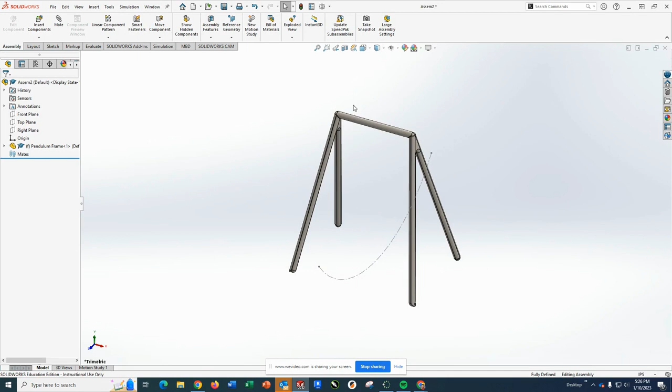The next component you're going to bring in is, click insert and bring in the pendulum. The pendulum is this large brass looking thing. We're going to use a mate that you're probably used to—we have a round hole and a round pivot point.

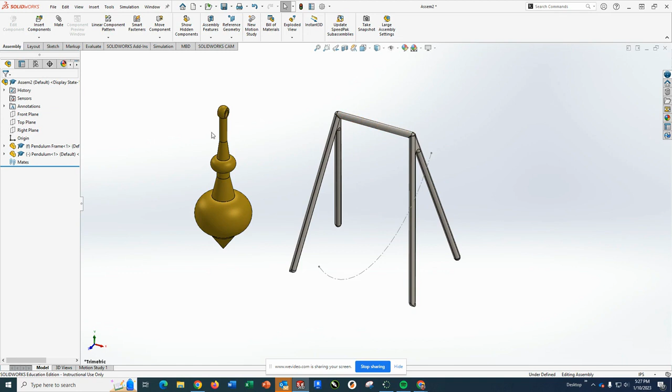So we're going to go ahead and click mate. The first thing we'll do is put the hole around the cylinder and make them concentric. At this point now, it'll go on there and it will rotate. Now a couple things next.

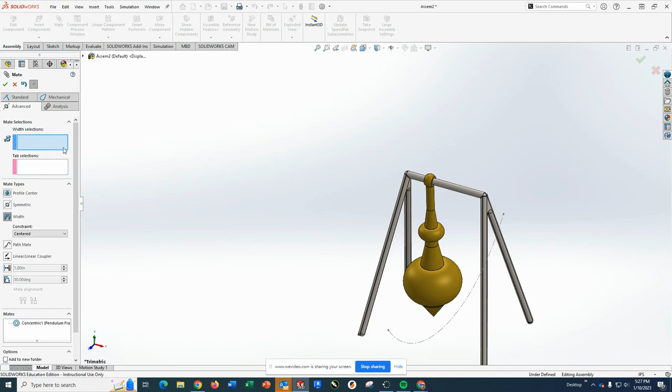First off, the width mate. What the width mate will do is put an item equidistant between two other faces. If I go to the advanced mates and pick the one that says width, the width selections show you kind of the opening or the size of something, so you just need to pick two that are the same. You can pick either this surface and this surface, or you could have picked the two outside surfaces. Again, as long as you pick inside-inside or outside-outside, you should be fine.

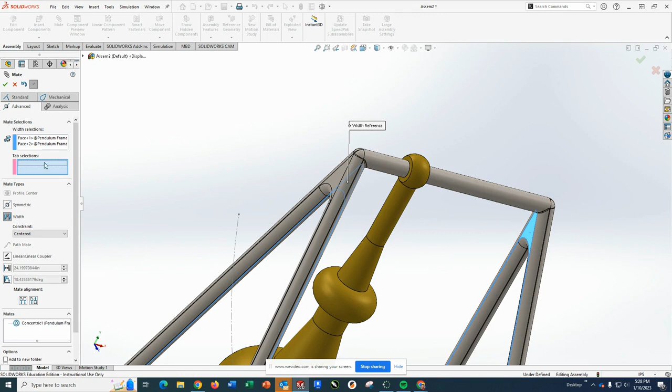But it does force you to pick surfaces—you can't really pick lines. And your tab selections are the selections of the item that should be centered, so we're going to pick both sides of this face. What it will do is center that so that it is in the middle. So as you do this now, you should be able to take the pendulum and swing it back and forth, and you can swing it all the way around.

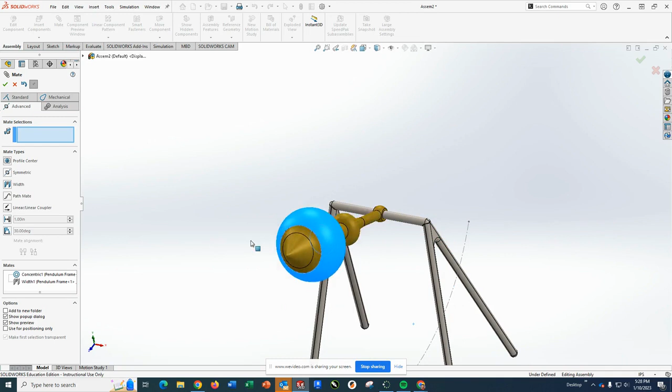Now the last thing we're going to do to kind of lock this in is we're going to apply what's called a path mate. You should notice that we're kind of right there where we need to be. So under our advanced mates, when we click path, it's going to ask us for two things.

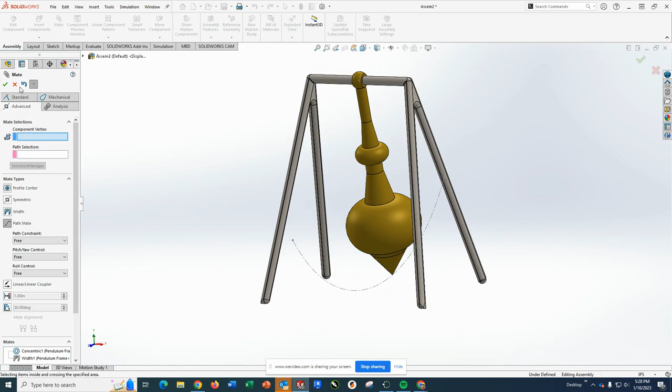The first thing it's going to ask for is—you know what, I'm going to get out of this and kind of angle this. So first off, using Control 7, that way you've got the front side, the right side, where they should be normal. And I'm going to bring this up such that the pendulum comes all the way past the path.

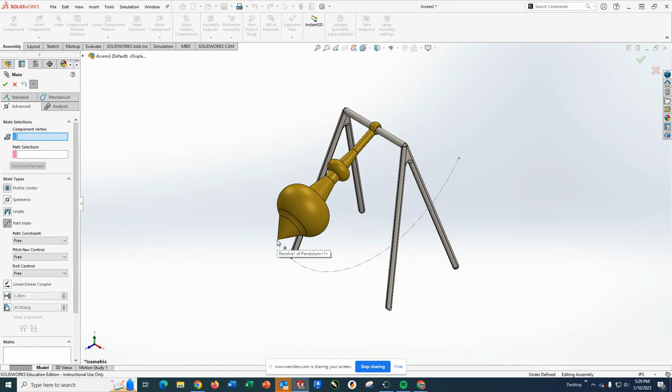Now when I do this, I'm going to take my mate tool, go to advanced, go to a path mate. I've got two selections: the component vertex, which is the very tip point of the pendulum here—it is the point that should stay attached to the path—and then the path selection, which is this line right here.

And you have a variety of different things you can constrain. Right now, we're just going to apply the path mate and get out of it.

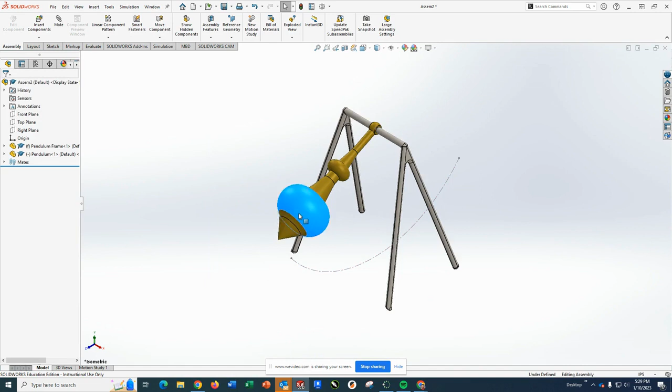What you will see now doesn't really change much of anything, because this is just a simple path that swings back and forth, which you can see was happening anyway. But the way the pathmate works is you can actually use some of that to your advantage.

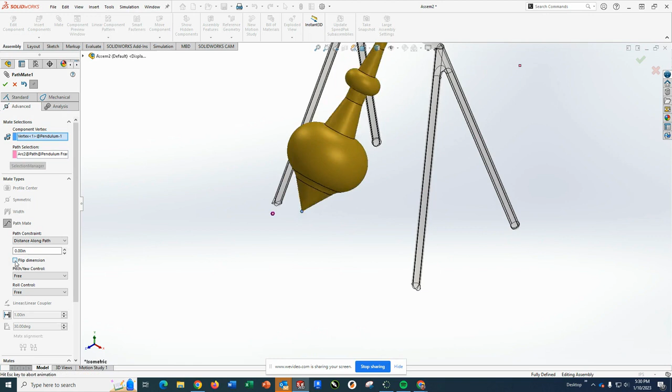So if I drop this down and edit the pathmate, I can tell it where to be. Path constraint lets me use a distance along the path. Right now, when you pick distance along path and pick 0, it's very important to see how it comes all the way forward. If that's not coming all the way forward, you can use flip dimension to switch it. You're going to want it coming towards the front of this — that's very important, so you get the right values when we do this later on.

What I forgot to do was set units — all the parts are drawn in millimeters, so your assembly should also be in millimeters. Now that it is, I can go to my pathmate and edit it.

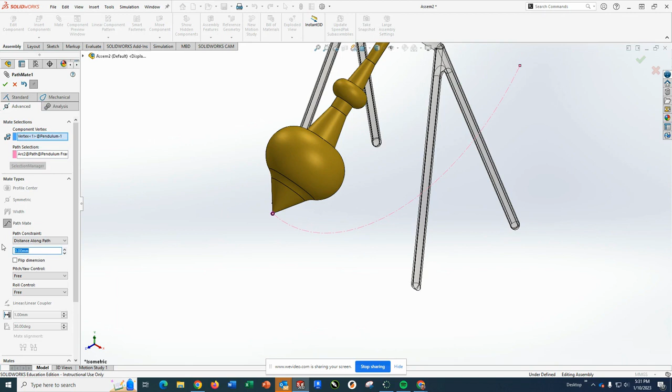It'll still have distance along path, but I can put in something like 365 millimeters, so it's going to go that far along the path.

The other thing you can do is say percent along path. So I could say 50%, which would put it right in the middle. I can also have it be 25%. The nice part about this is I could give you a percentage and ask what the distance along the path is, and if you just switch, it will tell you. This is obviously more decimal places than we'd normally work with, so you'd have to do rounding on your own, but it is possible to do.

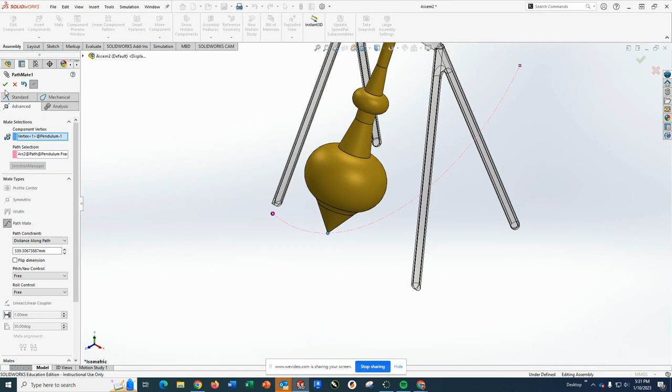So we'll go ahead and accept that. The last thing we want to do before we get started is create a coordinate system under reference geometry.

You'll notice I did move this off of that zero point, so I do want you to place it at the zero point.

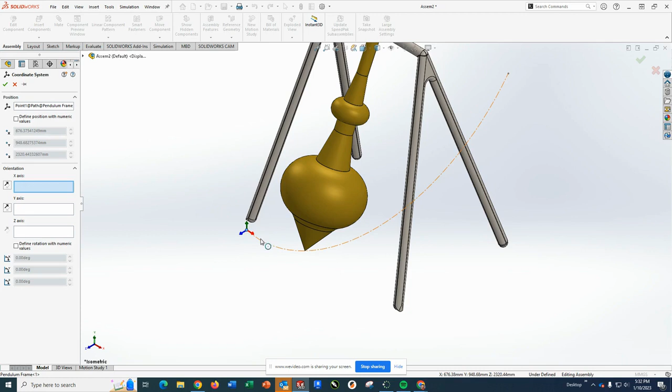What you should see is X, Y, and Z in the normal configuration, with the red arrow pointing out to the right, the green arrow pointing up, and the blue arrow pointing forward. In this case, you don't need to do anything other than that. As long as that comes through, you don't need to try to find anything else, because as you can see, there isn't a lot of squared or vertical parts to this, which is what we wanted. So we're just going to put it there.

We're going to leave the values as they are and accept them. So now, as you go forward and get asked to provide information based on this, some of it might be centers of mass with settings set in certain areas.

Just know that you should set what you need to, and make sure — as a quick review — when you go into Evaluate and then Mass Properties, that you are using Coordinate System 1 when you do your center of mass items right here. That way you'll be able to do what you need to do, and you'll get everything right with no issue.

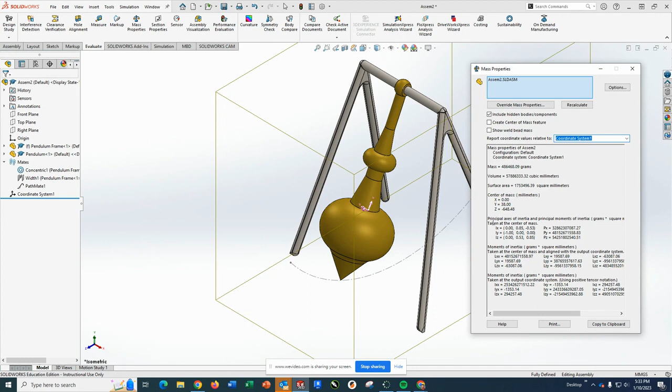So, all right, that should do it. At this point, you are all ready to use this assembly to answer some questions and gain some points.